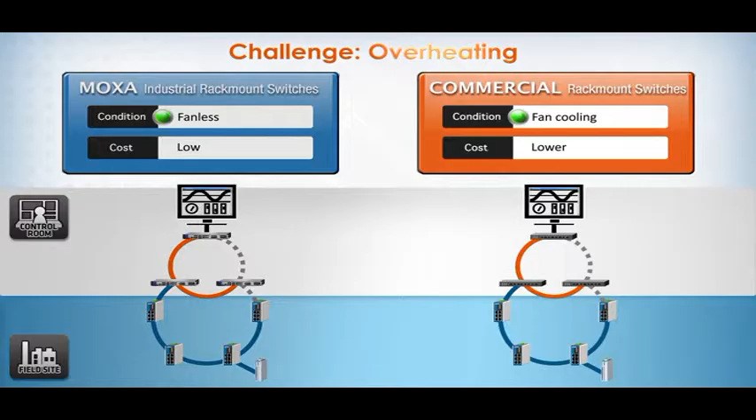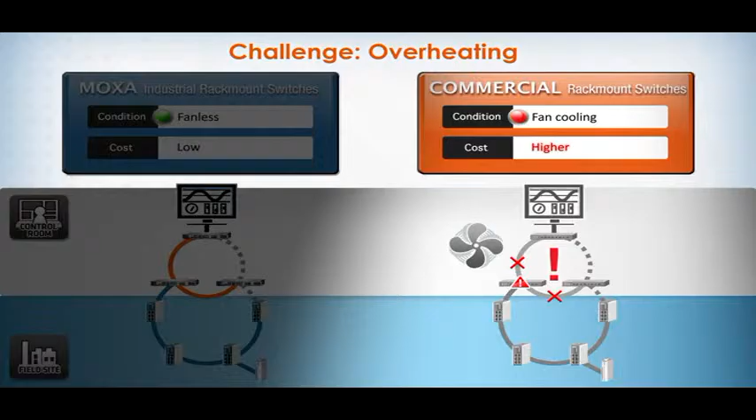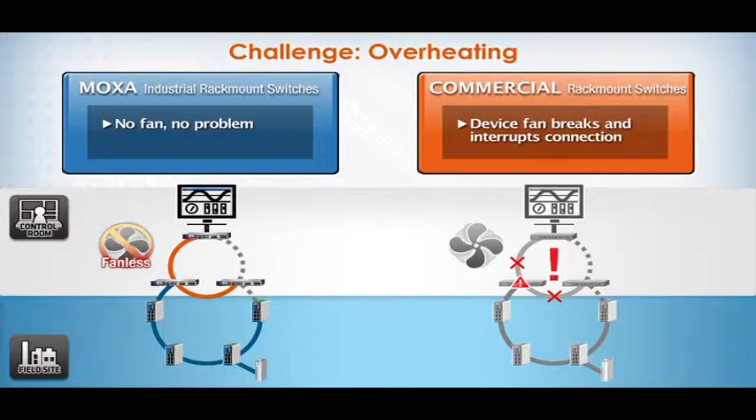To prevent overheating, commercial switches usually depend on fan cooling for heat dissipation. This cooling fan is an additional moving part and must be regularly cleaned and still can easily malfunction, causing a network interruption in the control room. This problem is completely avoided when Moxa's industrial switches are deployed in the control room. Moxa's industrial-grade switches are completely fanless. Without a fan, there's one less potential point of failure, so Moxa's industrial switches are far more reliable.

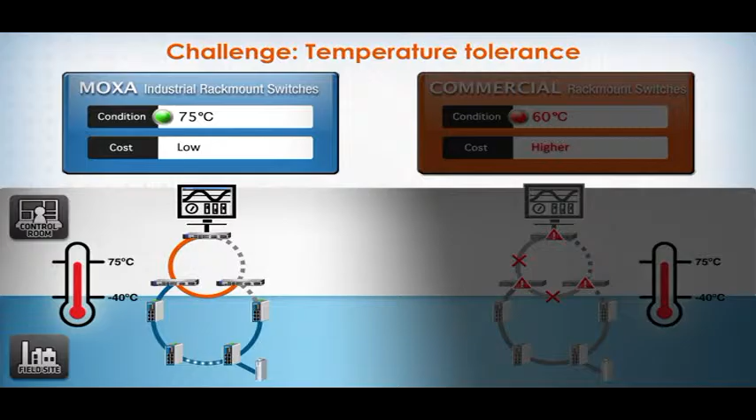Even with fans, commercial switches have limited tolerance for extreme temperatures and are typically only capable of operating in a 0 to 40 degrees Celsius range. Moxa's industrial switches can operate in a wider temperature range, all the way from -40 to 75 degrees Celsius. This gives users the flexibility to install these rack mount switches in harsher operating conditions, such as the factory floor or in an unmanned location.

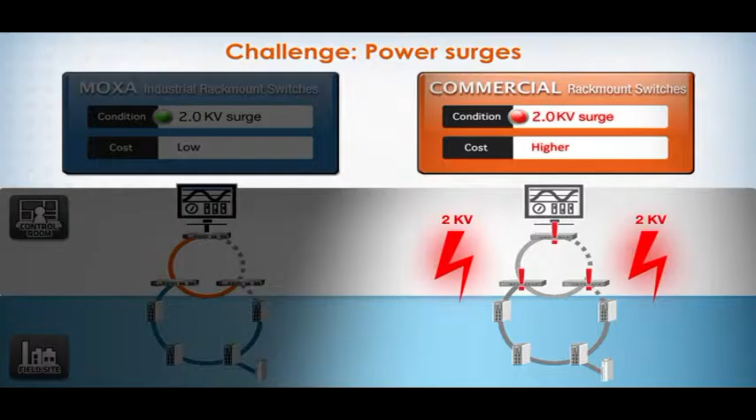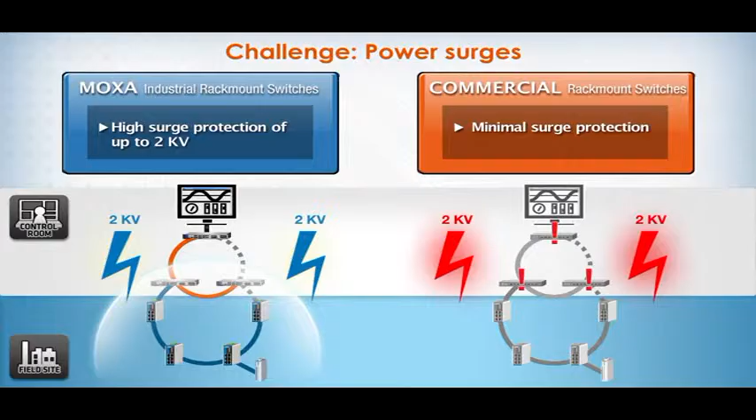Another major challenge is power surges. Any electrical surge over 1.5 kV can possibly damage commercial switches and break the network connection in the control room. Moxa's industrial switches support higher surge protection of up to 2 kV, so they can deliver reliable operations in control rooms. Resistance against surges allows Moxa's industrial switches to avoid surge damage and network interruptions.

EMI and EMC pose a similar challenge to commercial switches, which typically have lower radiation immunity of only 3 volts. This is insufficient to resist interference from any heavy-duty electrical equipment that may be near the control room. In contrast, Moxa's industrial switches have all passed EMC and EMI verification testing with a radiation immunity of up to 10 volts. This is level 3 EMI/EMC immunity. With this level of resistance, the industrial switches can easily withstand the electrically noisy conditions of heavy industrial settings.

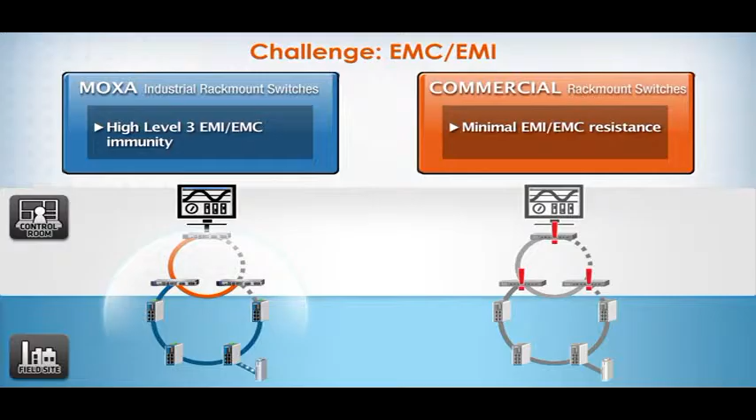When they face the challenge of network self-recovery, commercial switches typically support at best the RSTP protocol, which takes several seconds to detect and adapt to a change in the network topology. Moxa's industrial switches support Turbo Ring and Turbo Chain technology that enables 20 millisecond fast Ethernet recovery at a full load of 250 Ethernet switches, and also reduces the redundant network cabling cost. This difference in network recovery time translates into significant operational consequences. In mission-critical systems with highly precise and coordinated applications, even a 5-second network interruption can create serious disruptions.

The ultimate challenge of any system is achieving profitability. On this metric, while the per-unit cost of commercial switches is lower, there are many vulnerabilities of commercial switches, and they all add up to create a high total cost of operations, from frequent downtime, maintenance issues, and replacement cost. In contrast, while Moxa's industrial switches are not directly equivalent to cheaper commercial switches on a per-unit cost basis, they do provide greater performance and reliability and possess fewer vulnerabilities. This translates to a far better total cost of ownership, as industrial switches perform more consistently, are easier to maintain, and do not need to be replaced as frequently.

Moxa has 25 years of industrial experience, and Moxa's rack mount switches complete the edge-to-core industrial network that succeeds in mission-critical applications and achieves consistent uptime by extending industrial reliability to cover both the field sites and the control center for greater network continuity and profitability.